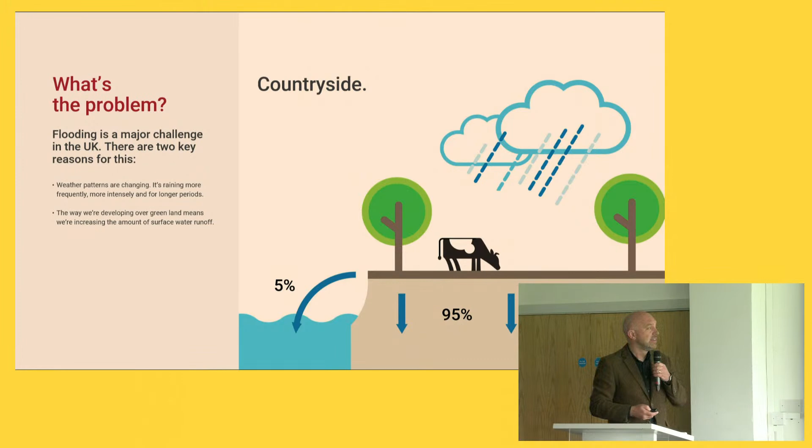Previously, when rain fell on open green land, most of it soaked down into the ground, and a little bit would flow away into waterways, channeled into the sea or a receiving watercourse, and that worked fine for years. But then companies like Marshall's came along and concreted over that beautiful green landscape, stopping the water soaking down into the ground. So the majority of water is now prevented from soaking down and instead flows at high speeds and in large volumes into the receiving watercourses, whether that's a sewer, river, stream or tributary.

So those 2 factors together mean that we've got a problem - that's why we're seeing more flooding going on. Sustainable drainage systems, or SuDS - the term was coined in the late 90s, ish - and it's cottoned on, and it's now become quite a radical movement.

It's not a new thing though, and this is the key thing we're keen to get across. Sustainable drainage systems aren't new, it's not 'there be dragons' - they've been around for about a quarter of a century.

What are they? Years ago, we managed water by channeling it away from infrastructure - that's basically what the Romans did. When water was coming down a hill towards them, they'd dig a channel, dig a route, and get rid of the volume of water, channeling it away somewhere else. That did its job - drainage was always about getting rid of a large volume of water.

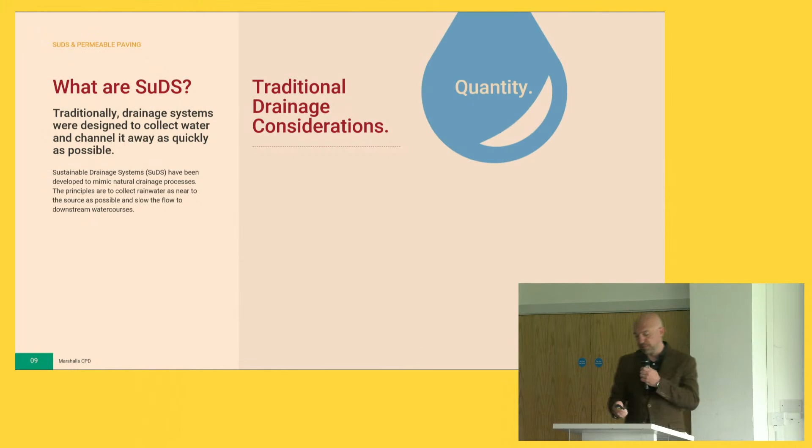They never really thought about the quality of the water they got rid of. They rarely thought about amenity or biodiversity - it wasn't part of the philosophy, it wasn't part of the principles of drainage. The whole idea was about getting rid of as much water as possible, as quickly as possible, to protect your infrastructure. A good sustainable drainage system, though, can do so much more than that.

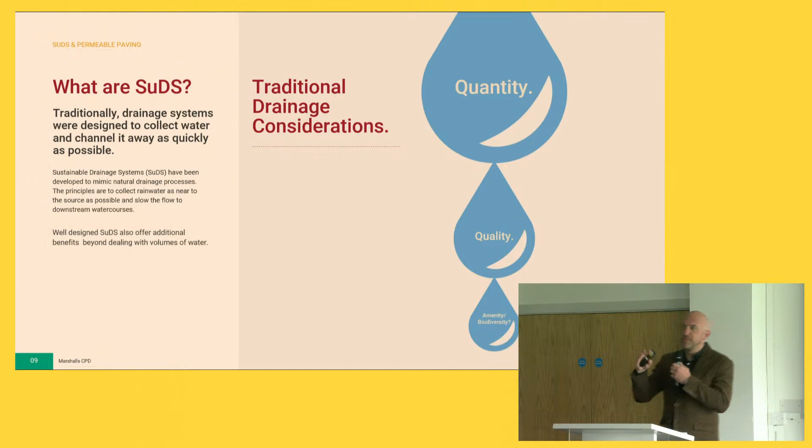So when it was launched, there was the SuDS triangle, wasn't there - the 3 elements you had to balance. That's become more complicated now - there's the 4 pillars of SuDS. People are trying to put new things in all the time. The key point is that you have to balance all 4 factors to make an effective sustainable drainage system. It's not just about the volume of water, it's not just about one thing - it's about balancing quantity, quality, and then adding in biodiversity and amenity.

We have to deal with the volume of water, dealing with the quantity is absolutely key, so we can't forget about that in all the stuff we're going to talk about now. If it doesn't manage the volume of water, if it doesn't get rid of the water, if it doesn't protect your infrastructure, then it's failed as a system.

But what a good sustainable system should also do is improve the quality of the water that flows off as well, because we've got a big issue with more cars on the road, so there's more pollutants. We've got a big issue with water quality as that goes thundering down into the sewers, carrying all the surface water runoff as well. So a good sustainable system will improve water quality too.

The two aspects at the bottom, though, are a fairly new concept. A good system can actually provide amenity benefits. It can provide a nice place for people to hang out in, a community space that kids can play in and people can sit and relax in. That's something a channel and a pipe can't do.

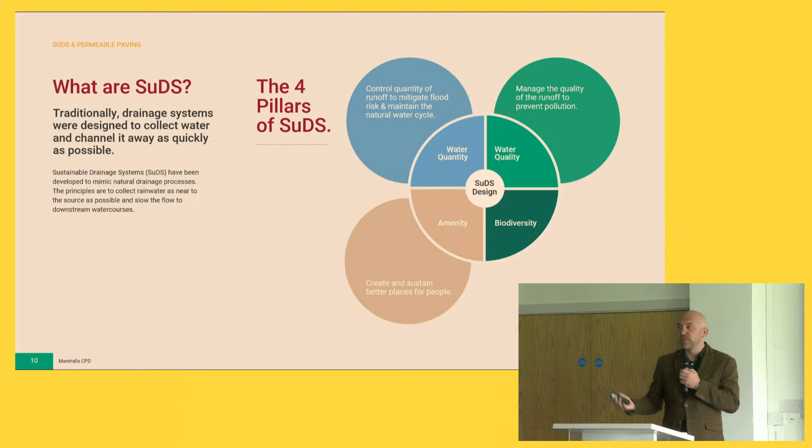And finally, as is getting more and more important with all building standards, it needs to provide biodiversity benefits. It needs to provide a space for flora and fauna to flourish in, for all the benefits it brings. I'm not going to talk about biodiversity net gain here, that's a separate topic in itself.

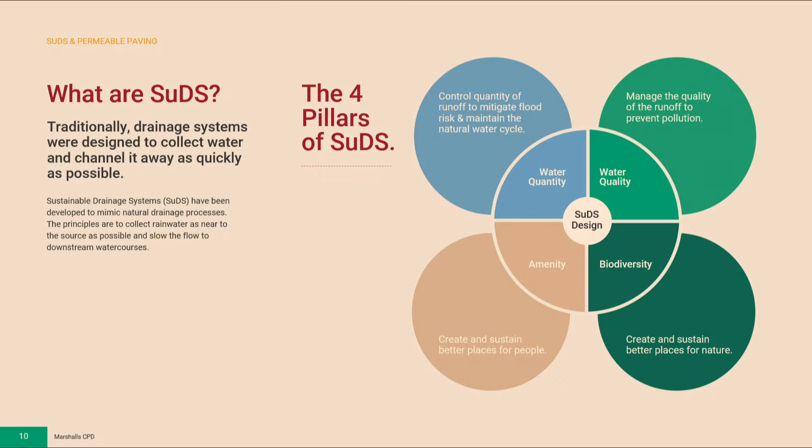But introducing more green infrastructure to spaces is going to improve things, as well as managing surface water. It provides air quality benefit, it improves air quality, it provides biodiversity habitats for animals and insects to live in, it improves mental health. There are so many multiple benefits from introducing green infrastructure. It's essential that we balance that while considering all the other things a drainage system should do as well.

While we're talking about that, something that came up through conversations over the past 10 or 15 years was that there are loads of different ways to manage water, loads of different tools, philosophies, products, and all of them have their place. So as a SuDS purist, and I'm sure Charlotte would say the same, you want to manage water on the surface, as near to the surface as you can, using soft landscaping, but that's not going to manage everything we need.

So what we came up with was the idea that you can use all the techniques, all the products, all the systems, as long as they're appropriate and as long as you've considered them in the right order.

So you start with natural flood management, which happens way before we get involved or you guys get involved. That's stuff like putting logs and trees and twigs across streams up on the side of valleys - something you do with your kids at the weekend - and it slows the flow of the water down the side of the valley, so by the time it gets to the urban catchment it's been slowed down and spread out.

So it allows water to infiltrate and it's not going at high speed. Then you want to consider soft SuDS, the features I talked about before, things like attenuation ponds - just big pools of water that store water, which soaks down over time. Rills, swales, just landscaped solutions that collect the water and allow it to slow its flow through your catchment, infiltrating all the time and picking up water quality benefits as well.

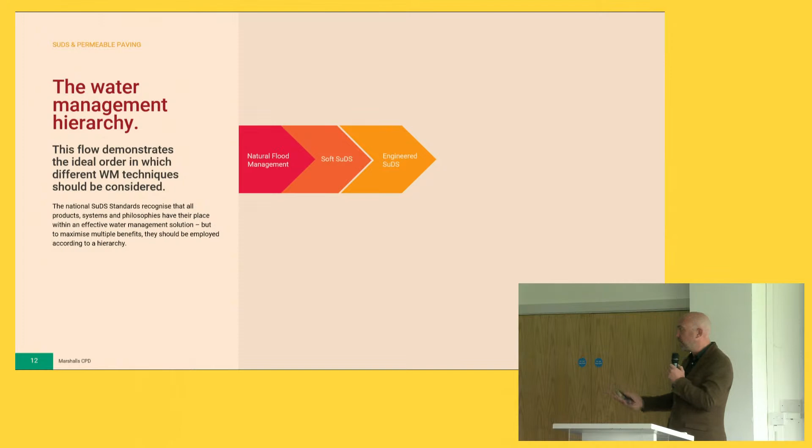When you've used up all those opportunities, look at engineered SuDS. This is where Charlotte and I, or Polypipe and Marshalls, come in - things like permeable paving, and the green infrastructure solutions that Charlotte will be talking about shortly.

And there's absolutely a place - we say positive drainage - for things like channels and gully pots. In an urban space, you need that kind of positive drainage to get water safely and quickly away from the space. Underground attenuation is absolutely necessary as well, we're talking about big underground tanks and pipes. Polypipe have, a big part of their offer is crates.

A big part of what we do as well is underground tanks and pipes. The point is, you don't go for that option first. Start at the left-hand side of that graph, move your way down, and before long you're probably going to end up at the point where you need underground, big sort of heavy-duty storage, certainly with the deluges that we're going to see coming.

And there's even a place for flood protection, just building a big wall to stop the flood water coming. All of those are legitimate, sensible approaches to water management. Just think about them in the right order and use them in the right way.

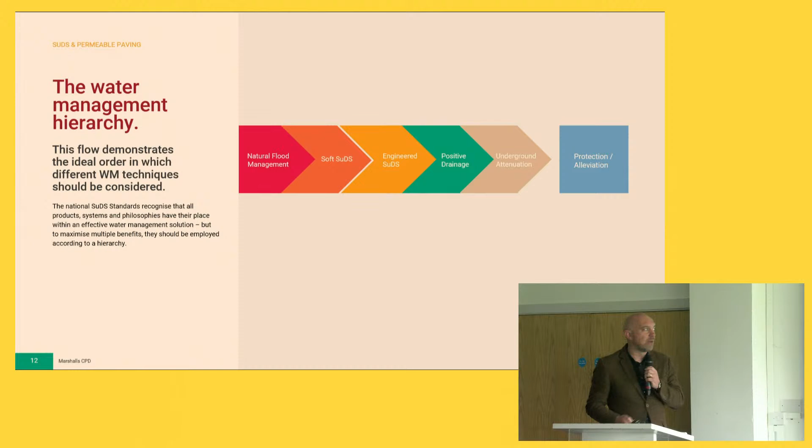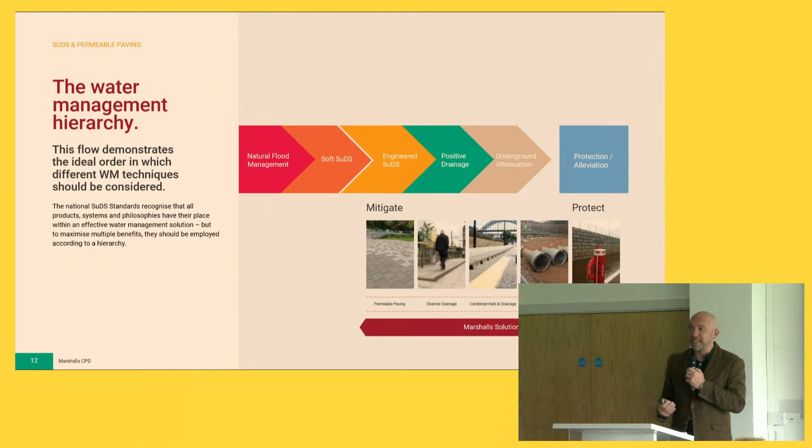What's interesting for us is that's the area that we operate in. We don't sell grass and we don't sell trees, but what we're finding is that legislation and more awareness is driving people back up that hierarchy, driving people to consider soft SuDS first. So the challenge for us as manufacturers is to come up with products and systems that make it easy for people to install those features.

And the challenge for designers and installers is to think straight away about how they can cram as much green space into their developments as they can. And that's not just for drainage purposes - that's for all the other legislation, the biodiversity net gain, the nutrient neutrality legislation that's in place in some areas as well. So that's as much as I wanted to talk about to start off.

So hi guys, I think what Chris said was absolutely right in that we have to think about the way that source control SuDS and shallow systems work with deep systems and how that green infrastructure as well as engineering works together. And I was working with a colleague of mine at Polypipe when the new sewer sector guidance came out.

Chris and I were talking about this because one of the things that you guys will see as a merchant is that the legislative changes that take place really do, as Chris said, drive people back up that graph towards the left, towards the more soft systems.

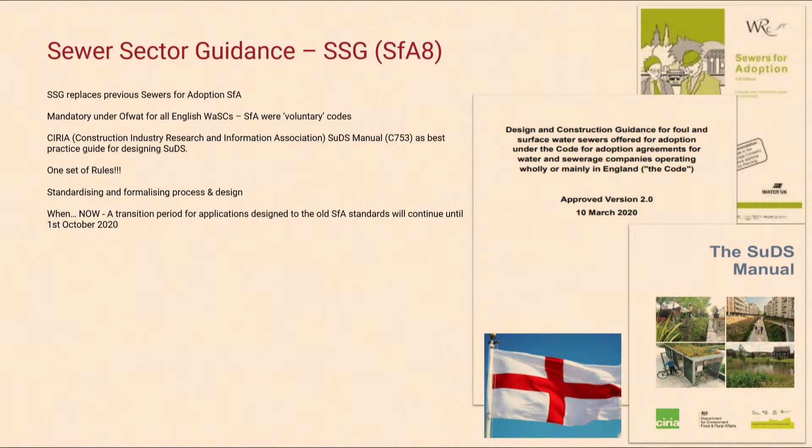And what we're finding now is that water companies and planning authorities are actually telling developers, we don't just want deep crates and pipes as a first point of departure. We want you to consider how you could think about tree pits, how you could think about swales and other green infrastructure assets as adoptable forms of a sewer.

So actually the definition of a sewer itself has now changed to incorporate green infrastructure, which has caused a heck of a lot of confusion with the water companies because they're coming to us and saying, well, what does that mean in terms of how can a tree pit convey water? How can a tree pit manage water? This is all weird and wonderful to us.

And as a merchant, if you've got this knowledge and you've got the product ranges from Marshalls and Polypipe to be able to facilitate that, you've really got a USP because they're going to be coming to you to ask you how this all works.

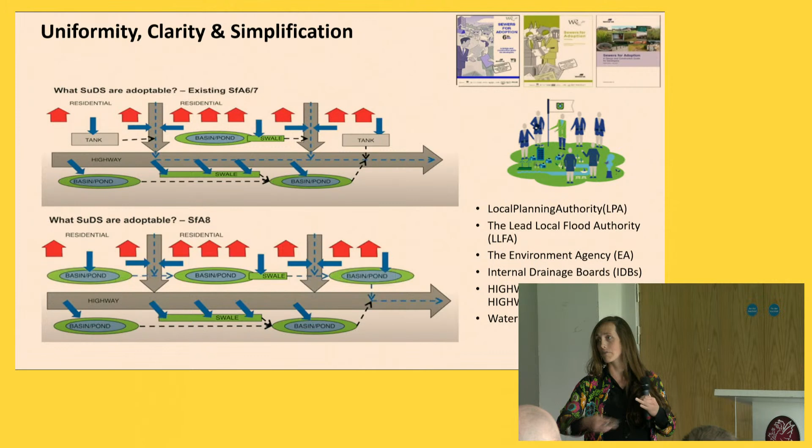And what you might see on a development, which is a really good change and not necessarily a problem, is that you'll have a mix of what we call adoptable and non-adoptable features. So adoptable meaning that the water company will happily take on the maintenance and the management of that asset post the sale of that plot and everything going through. So tree pits, swales, basins and ponds, soakaways, what Chris and I were talking about with crates and pipes - they're all perfectly adoptable.

But you might find in the near future that lower cost systems, for example putting vegetated roofs on top of a garage or indeed green and blue roofs, will actually be something that a lot more developers are exploring. I've had a lot of developer clients coming to us talking about new builds that will automatically have green and blue roofs on to store water or for added, as Chris was talking about, biodiversity net gain.

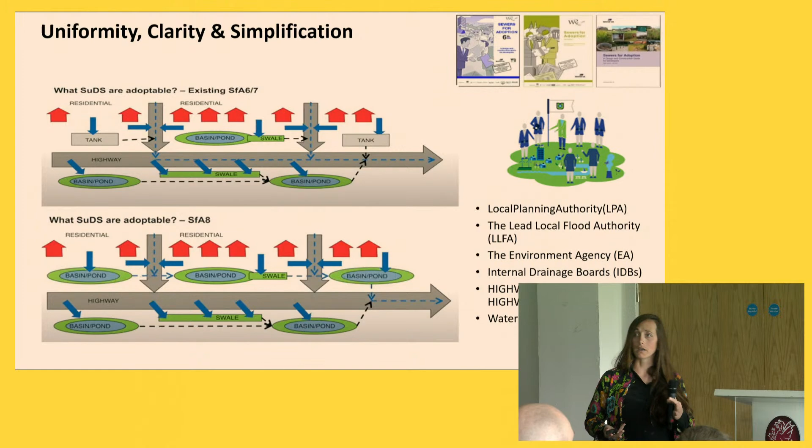So there's going to be a range of green infrastructure assets on new developments with a range of requirements in terms of products, solutions, services, all of which can and should manage water. So these are just a few things that guidance change has actually precipitated - this more creative response to managing water. And we're seeing this in the designs that are coming forward from engineers.

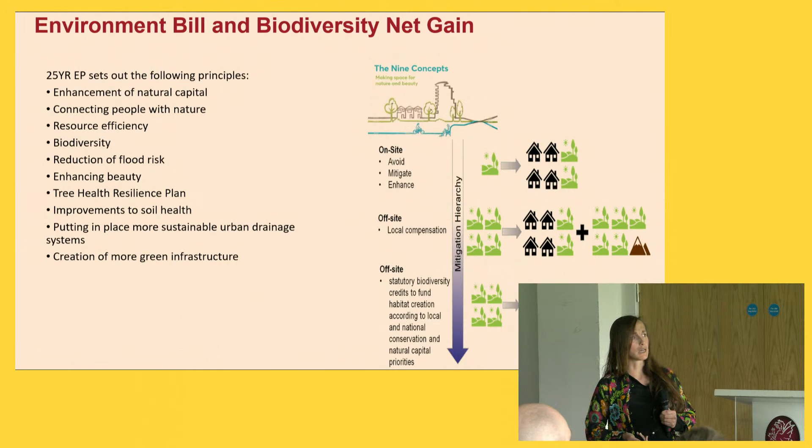And again, the Environment Bill, the move towards net zero, and there's even new talk particularly in central government around what they're calling water neutrality now. The idea that every development should be water neutral, it shouldn't be adding any more water to the combined sewer network than when it began.

This is all a huge pressure for viability, because if you're a developer, you've only got a finite amount of space to pull all this off. And this is where you guys come in, because if you can optimize those green assets through engineered solutions beneath them, to support those green assets and also manage water, if you've got multifunctional ways to do this, you're really cooking with gas, because you can offer that full range of solutions that will save space, time and money. This is a really good area of the market to exploit if you get it right.

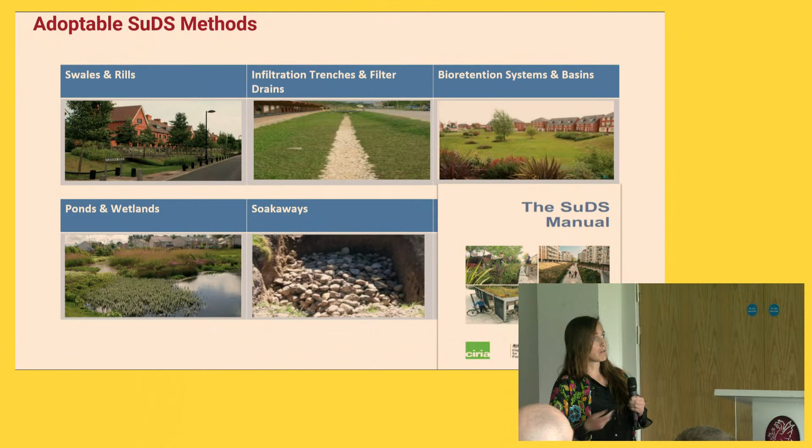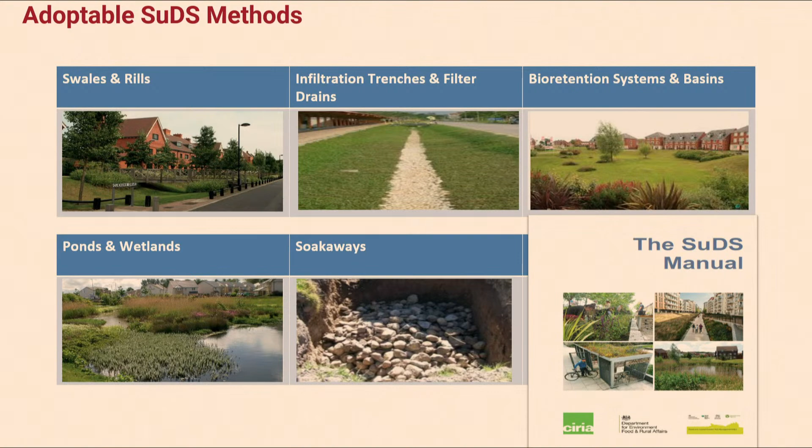So what's adoptable? Swales and rills, we'll go through that in a minute, bioretention systems and trees, and as Chris was saying, soakaways and ponds and wetlands. So we do a lot of work on this, and Marshalls as well do a lot of work on these kind of approaches, where we're not just doing the soft SuDS as we described at the very left of the spectrum, because we can't always do that.

There might be a reason why we need to put more water storage under a green space. For example, if you've got a small compact development, if you've got an urban site, we often find that actually to manage the volume of water we need to on a particular plot of land, we need to be giving you more water storage. So this is where we bring in the green and the blue together.

This is where you as a merchant can talk to the developer about the kind of systems that could be used to make this happen. And we're not there yet, I'm not going to lie. We don't see this collaboration all the time because it's quite a technical sell. As you can see, there's a lot of design work involved, ordinarily a lot of technical expertise required. But there's no reason, when Chris and I were talking, that this couldn't become more off the shelf.

Especially on residential developments, there's no reason why these can't be packaged up and made more accessible for developers. There's a lot of time and money and a bit of wasted energy, actually, where people go around the houses trying to integrate trees and SuDS on a site, where really if they just had a simple, accessible package solution, some of the things I'm showing you here, with just a few product ranges that you guys could offer, Marshalls and Polypipe are well able to facilitate these kind of things.

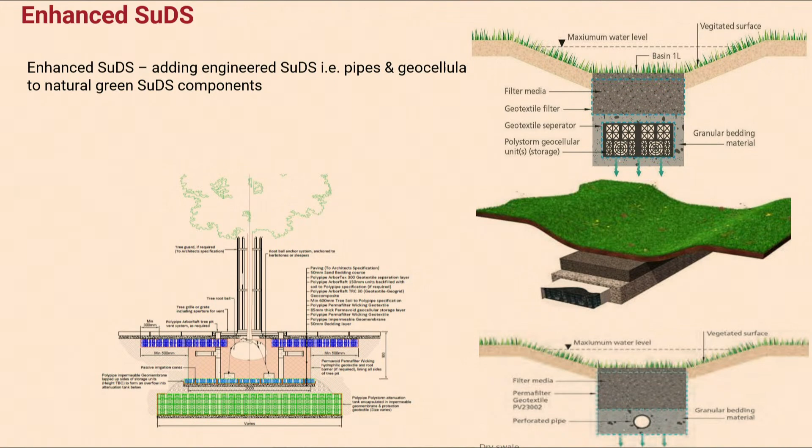It's very simple to enhance and optimize green assets on a development. So by using something like our Permavoid or our Polystorm crates, we've acquired other businesses within the Polypipe family for more of an extended product and suite of solutions. You can actually cater to developers with a variety of budgets as well, because what we don't want to do is price people out of greening their developments. And I think that's a real barrier sometimes, particularly in things like Tree Pit World.

Chris has probably experienced this as well. You know, developers, they're not anti-greening, but they're just anti the headache, the time, the money that they perceive these things to take. So we've got to make it easier, simpler, and pain-free.

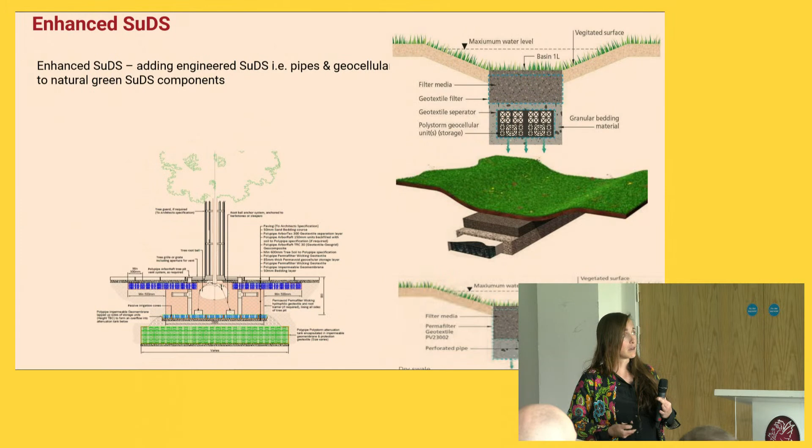And indeed, treatment and removal of pollutants is becoming a huge issue, and it's really expensive. So we've got to look for cheaper ways to create green assets that can also manage things like phosphorus. That's a huge issue that you guys are going to come across even more now. And I think Marshalls and Polypipe working together for how we can create kind of integrated approaches to getting phosphorus off a site and making that cheaper is going to be a really good way forward.

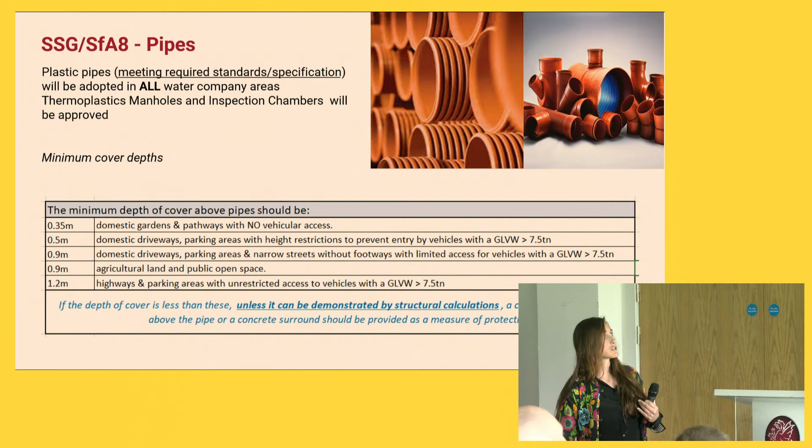I don't really want to talk about pipes today. It's in there, but please forgive me. My colleague Sue Illman and I were looking at the Polypipe website yesterday, and she was like, it's all about the pipes, come on. And I said, we are under construction on the website, but we do more than pipes. But they are necessary. So despite my personal aversion to talking about pipes today, we do have to get water from A to B, and there are times where between green assets and between SuDS features, we're going to need some pipe, whether it's Marshalls or Polypipe, we're going to need it.

On any development, you'll be able to package this up so that you've got your conventional suite of solutions and your more creative green infrastructure assets. So the developer has got you as a one-stop shop to go green and also use conventional methods. As Chris said, the reality is you might have some tree pits, some SuDS, then you'll have to convey through pipes, have a soakaway, some deep attenuation tanks and some treatment. So you're selling that holistic approach as well as slowing the flow.

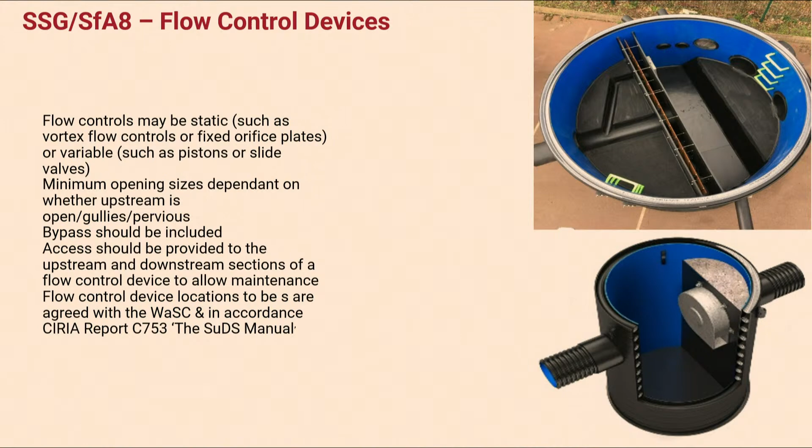We're not beavers. We're not going to be able to just put a load of twigs somewhere and slow the flow on a development site. We're going to have to slow it through some other means. We can do some natural flood management upstream, but in reality, there's going to be times where flow control and those kind of interventions are necessary.

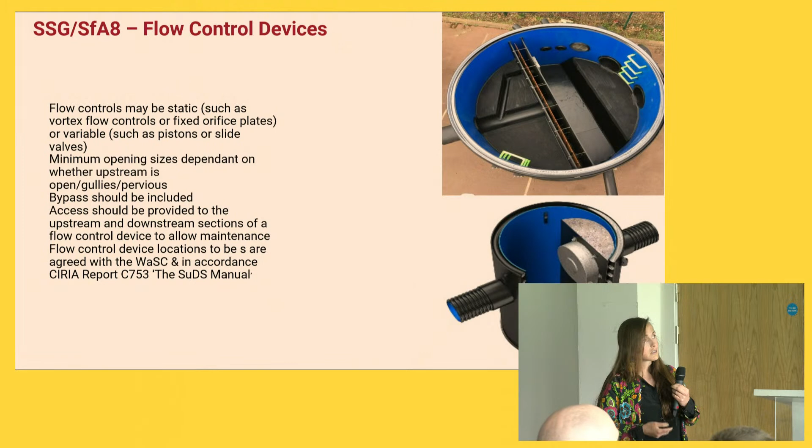So again, it's about understanding that range of solutions. I definitely recommend, if you haven't, have a look at the CIRIA guide for the construction of SuDS. It's not bedtime reading, but it's a really good point of departure to understand where developers and designers are coming from, and all the SuDS features are covered, from tree pits to swales to bioretention to basin tanks. I wanted to show this because Part C of the new sewer sector guidance talks about how these adoptable, non-adoptable green features come together.

As Chris was saying, there's a time and a place for everything, and permeable paving is in there, swales are in there, storage tanks. What we discovered from chatting together is that there are lots of ways Marshall's products and Polypipe Permavoid systems can create the ultimate storage beneath Marshall's permeable paving. There's no reason why you can't optimise that permeable paving offer, and no reason why you can't mash up the two product families.

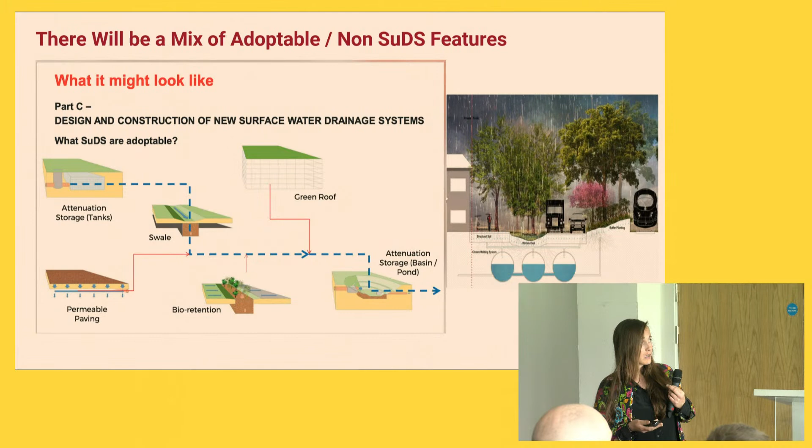These things are compatible, and you should exploit the people supplying you to make the best of what you can offer. This goes for how you mix up all these features. You might well be able to sell some attenuation crates. You could use other geocellular to create an enhanced swale feature, and you can also use geocellular for things like permeable paving and tree pits. At Polypipe, we use a number of these geocellular options to do all this.

That's not to mention also the importance of rainwater harvesting, which actually we didn't talk that much about. But it's not because we don't know a lot about it. Rainwater harvesting is something we're getting asked increasingly a lot about, and also the evolution of smart as well.

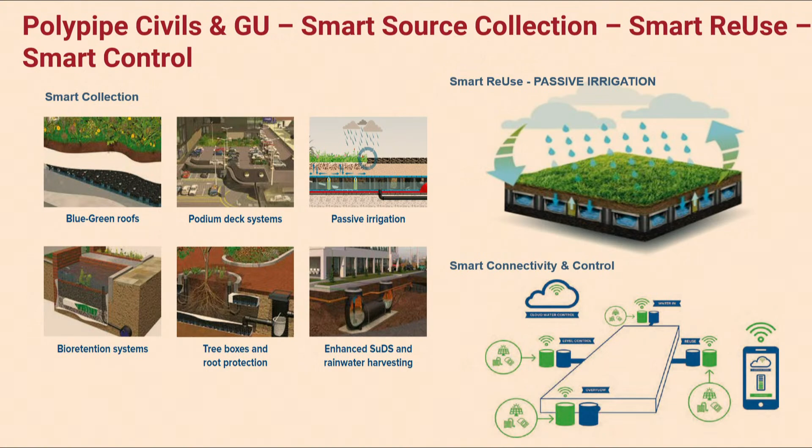That's another thing I wanted to signpost, because we're moving towards a world now where IoT and tech solutions—in the Netherlands, for example, even basic domestic garden centres and companies sell smart systems for people to manage water in their greenhouses and automate a lot of services, making them lower maintenance.

I think there will be a time in the future—and Chris is talking about how we mess around with things like the triangle of SuDS, the 4 pillars of SuDS—I think added on to this idea of quantity, quality, amenity and biodiversity, the 5th pillar will definitely be smart in the future.

Just like you can turn on your heating when you're away from home, you might even be able to manage your water and your irrigation and your SuDS features remotely in the future, which we're doing on green and blue roofs, and which we're doing at a local authority level through tree pit systems, alerting local authorities when their tree pits are dry or when their green assets are failing.

This is something developers and management companies will really exploit, especially if they've got 2 or 3 years worth of obligation to keep them looking good after they've handed them over. So in terms of long-term management, there's a lot of things really happening.

Not to mention the importance of passive irrigation, which is something you could easily also sell as a merchant—the use of capillary cones within geocellular systems to enable us to wick the water back up towards the green asset and store it, so that we even out those periods where we've got too much water and not enough, so we're not just constantly using mains water to keep things looking good.

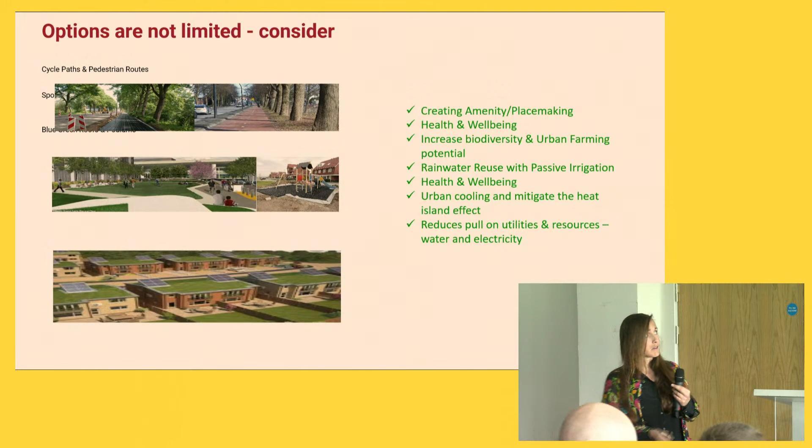So it's much more sustainable than business as usual, but it's not limited to those kinds of approaches. Consider all those enhanced added benefits - think about the amenity, the placemaking, reducing the pull on utilities and resources, rainwater reuse and passive irrigation. I don't really want to go through the whole plethora of the product range, but these things all work together.

And do ask us about it, and we will do training. Marshall's probably the same - our door is always open to add on to what you're hearing today. And they're simple, modular solutions.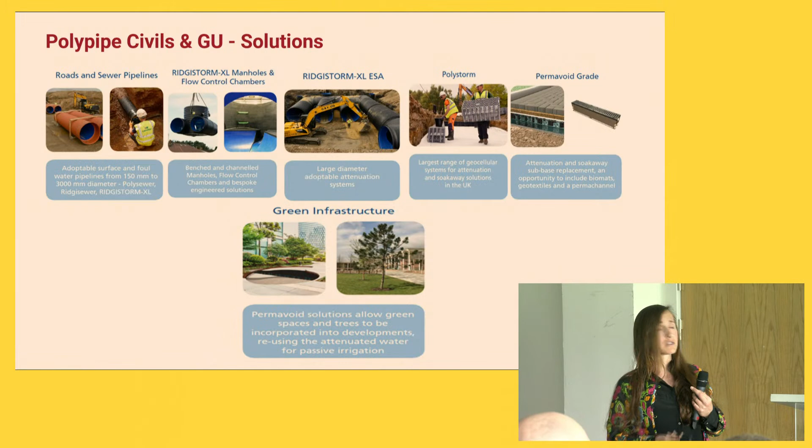This is just an example of our permavoid system with passive irrigation, and this does so much for a developer if they know how to use it. If you guys are enabled to explain to them how it could be used under a green asset, for example a tree pit or in a rain garden, then the possibilities for them really open up.

As well as working on a scheme, even with permeable paving as an example - often you might use an aggregate underneath permeable paving. Let's be more sustainable, let's consider using something like a permavoid unit. Let's make it cheaper and easier for the developer to bring product to site, reduce labour costs, and think about all those added benefits of how we mix and match products. Not to mention we can reduce loading when we use more structural, modular, enhanced solutions.

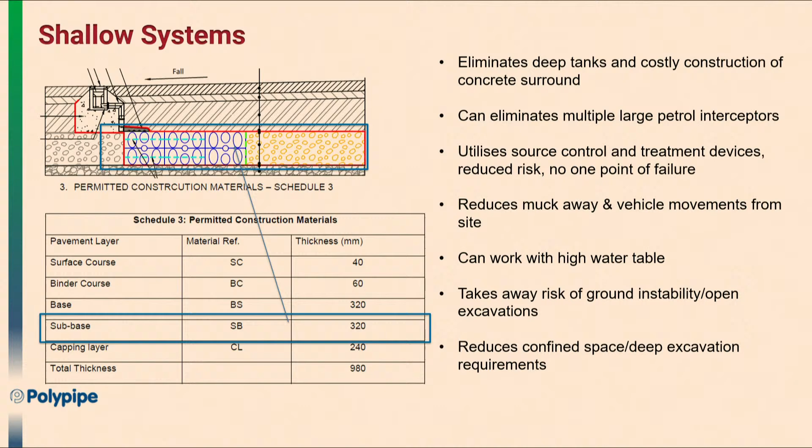And make use of our design guide. We've got a really good design guide that's downloadable, and it'll show you how to design with all these SuDS features. I'll send Giles a link to that design guide so you can all make use of it and ask us any questions. It just shows how these products can be packaged to create these off-the-shelf solutions to give people what they need, and with technical details we can help you guys detail up these kinds of packages.

This does look a little bit scary when you first look at it - it did me when I first joined Polypipe. But actually, they're really simple ways to integrate geocellular with Marshall's permeable paving, for example, or some channel drainage. As Chris was saying, in reality we'll be using 3 or 4 different products or techniques in one package solution when we're doing SuDS.

And it's really simple - just pick up the phone to us, and we can guide you through it and tell you how to package all that up together.

The big one for me, being the green urbanisation person, always being called the tree lady in the office - if you're going to go green, developers always name their roads on a new development like Sycamore Drive or Maple Avenue, but in reality the trees just look dreadful. Why is that? It's because they don't do it properly, and they try and get away with as little as possible - it's not their fault, they're just being priced out of it. So my mission is to get tree pit packages into you guys that will be off the shelf, much cheaper, much easier for developers to get volume trees onto a site that can also manage some stormwater and surface runoff. Importantly, they need to be structurally sound enough not to buckle under a highway and to annoy the highways engineers so they won't adopt them. These are the challenges of doing proper green engineered SuDS solutions.

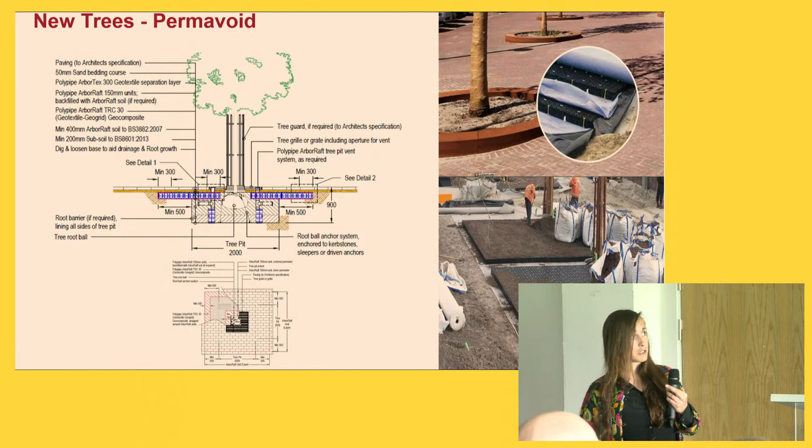So this is what we're here for - this is what Marshalls are here for, to make this easier. And we could also get to a point where we start getting you guys to give good advice on the soil as well. Soil's a big part of this - SuDS without soil is a bit of a dud. The soil is a huge part of it. The specification, the porosity, how water moves through the ground from start to finish is critical, and we need soil volume if we're going to create these decent green assets for the future.

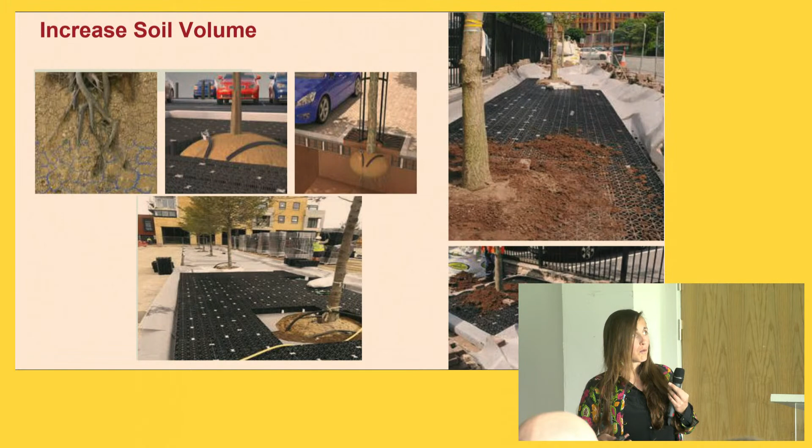Again, you can design 2 SuDS features at once - you don't just have a rain garden, for example, you can put some trees in your rain garden if you've got the right products. You can mix up all these features, and it's really modular and really simple.

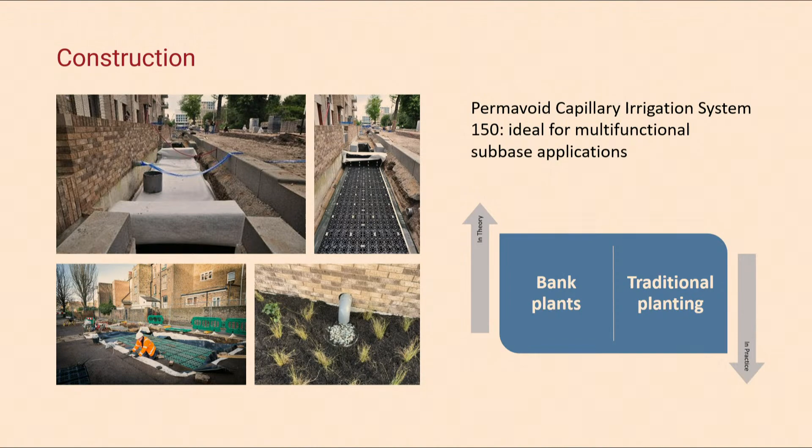And I'm going to hand back to Chris to talk more about permeable paving as well.

Well, that's bang on time as well. It's almost like we rehearsed it.

Just to pick up a point about smart water systems, one of the things we're preoccupied with at the moment is that another consequence of climate change is the urban heat island effect. We're going to get really hot, really uncomfortable urban spaces in 10, 15, 20 years' time. One of the solutions is green infrastructure, so that's another reason for putting more trees and more green infrastructure in. But another one is open water. If you've got a large expanse of open water, it instantly makes people feel a psychological effect - you instantly feel 1.5 degrees cooler when you see open water. But it also actually, the evapotranspiration effect cools the area down as well.

If you ever want to go to Bradford, which is just down the road from us, the Centenary Square in the middle of the city is just like a slightly contoured paved area. But when it's hot, they pump water into it, and it's amazing. From a place-making point of view, kids come out and play in it, families come out and mess around in it, and it feels cool. It's a really practical system.

So the idea of having a smart water system that holds onto rainwater when it can provide an asset, but releases it when we know there's a storm coming and we need the storage - that kind of smart water system is something I think we need to look into a little more. Another point I picked up on is that a lot of the details and concepts we've been looking at might look really complicated because there are loads of different circumstances and applications, but ultimately it's only about 6 different components. So in terms of stock holding, there's only 6 parts to that Lego kit, but you can make so much with it.

And it's the same with permeable paving, and that's what I'm going to bore you to death about. This is what I've been clattering on about for the past 10 years. So if you have got any questions later, I'd be more than happy to talk to you about it, but I can't say I'd recommend it.

Let's see if this works. It might.

Yes, this is our sort of Marks and Spencer's advert, slow motion, high definition, super sensuous.

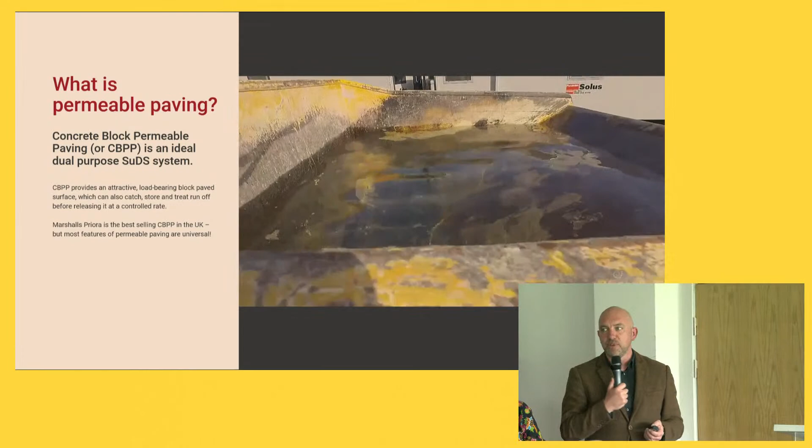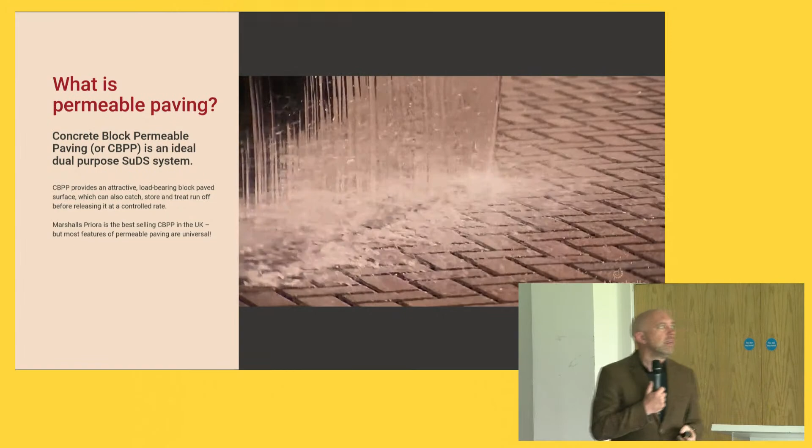Data from here, for 4 years. They'd not really done any maintenance on it. And it disappears - so it's a brilliant source control method.

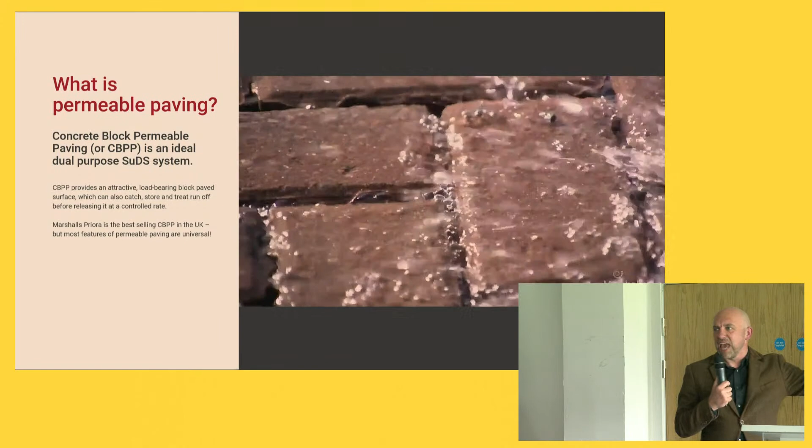Basically, you're not going to get a rainfall event like that, even in this country. But basically, when you get a heavy rainfall event, what happens is the rainwater soaks down the gaps between the blocks, and that's the crucial thing to get across.

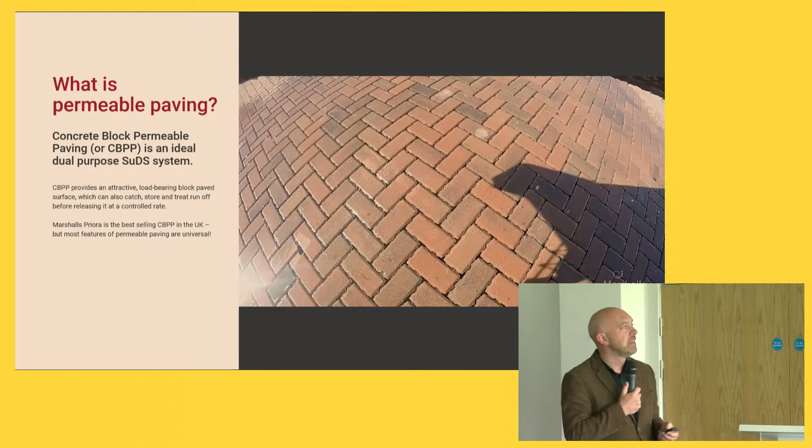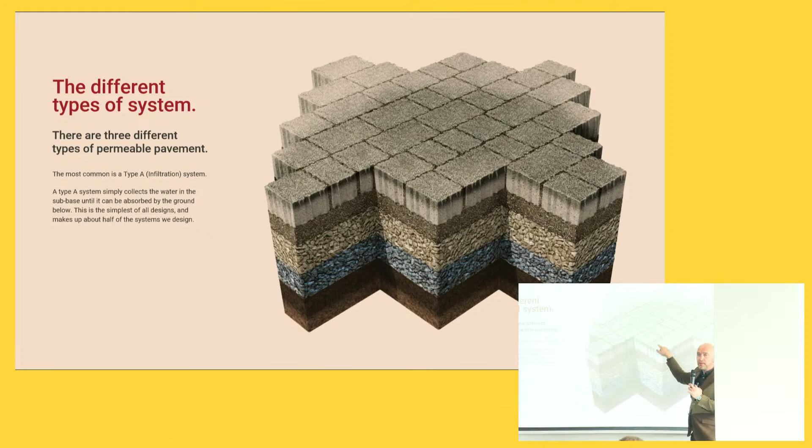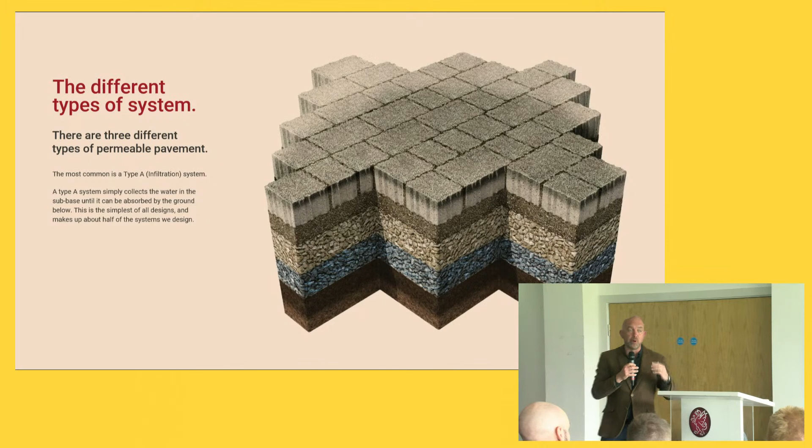If you're not aware of it, we've got some animations now - I think it's starting automatically. The crucial thing to get across is that it's just the same as a normal pavement. As far as an engineer or an installer is concerned, the blocks are made out of concrete, just the same concrete as all our other standard block paving. The difference is they've got special nibs on the edge, and the nibs keep the blocks away from each other, so you get wider joints between them, and then you lay the blocks on a different subbase than you would a normal pavement. But the principles are exactly the same.

Normally, you'd put MOT type 1, put sand, and then put concrete blocks on top. With this, you put in large open-graded crushed rocks, then smaller open-graded crushed rocks, and then blocks on top. So what happens effectively is the water soaks down between the gaps, it sits in the subbase, where it can do one or two things.

In this example, a type A system, it'll soak down into the ground at source. And that's the ideal, because it's dead straightforward. Then it's source control, you've not got any ponding, you don't have to worry about channels or drains. Basically, wherever the rain falls, it's just going to soak down into the ground, and you've got a zero discharge part of that development. About 50% of our designs are type A systems, where the water soaks into the ground.

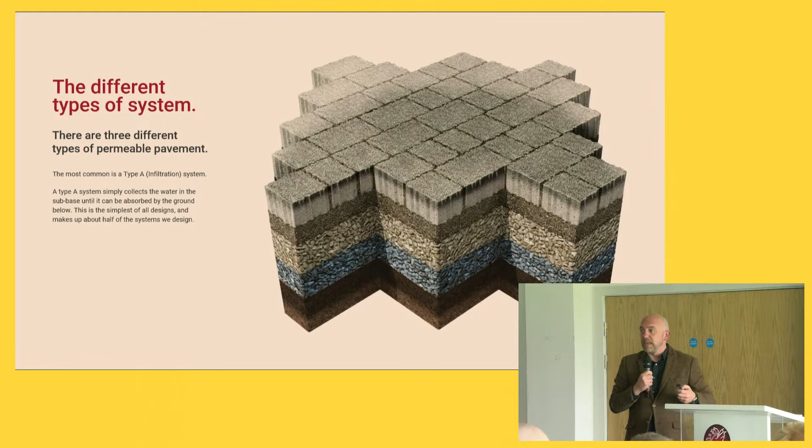Alternatively, you've got a type C system, because you might have contaminated ground, or a lot of contaminants potentially on the surface that they don't want leaching into the ground below. So what you do is put this membrane, an impermeable membrane, around the bottom of the tank. You're effectively creating a basin, so the water sits in that, and then it's channeled away at a controlled rate. So it's not soaking down, so we're using the pipes again - we're not dead excited about pipes, but they're a useful tool to have in your armoury. So you'd have a perforated pipe at the bottom of that system, and that means you can direct the water where you want it to go, at a rate you need it to go at.

And the other point is that we know through some work we did with Coventry University about 6 years ago, that the water that comes through the system is already being cleansed, because there's a mechanical and biological filtration process that goes on throughout that system, because there's a lot of microbes living in the subbase. So that's why good SuDS designers like these systems.

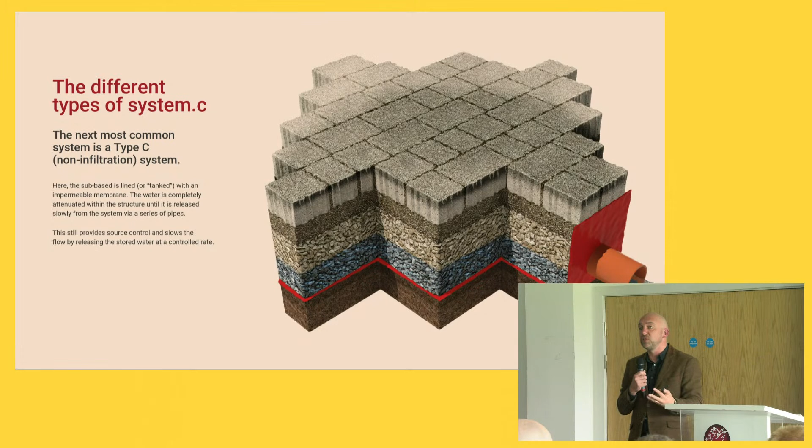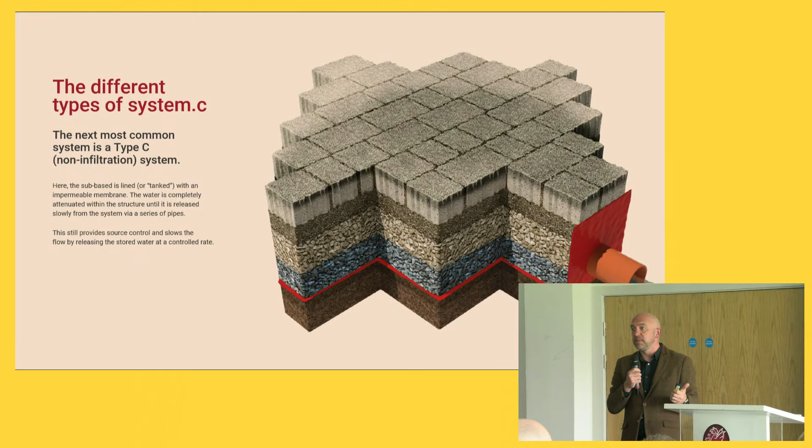They don't provide biodiversity benefits, so let's face that one off, and they don't really provide amenity benefits unless you like hanging around in car parks. And if you do, that's your business. But they do provide brilliant source control - they get rid of volumes of water, and they improve water quality. So that's why they're a useful tool to have in your belt.

We always talk about putting permeable pavements on top of aggregate, because we know how that works. But we've come across more and more jobs lately where putting them on top of crates or tanks, putting them on top of permavoid, allows you to get much shallower systems.

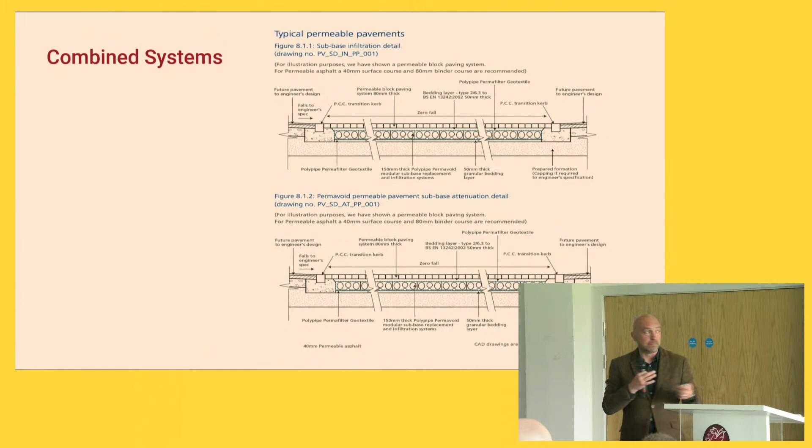The void ratio in the aggregate that we specify is 33%. So for every 3 cubic meters of subbase, you've got 1 cubic meter of water. The void ratio in a permavoid tank is 97, 98%. So basically for every 3 cubic meters of crate, you've got very nearly 3 cubic meters of water storage. So that means you can get away with shallower systems - you don't necessarily have to go as deep.

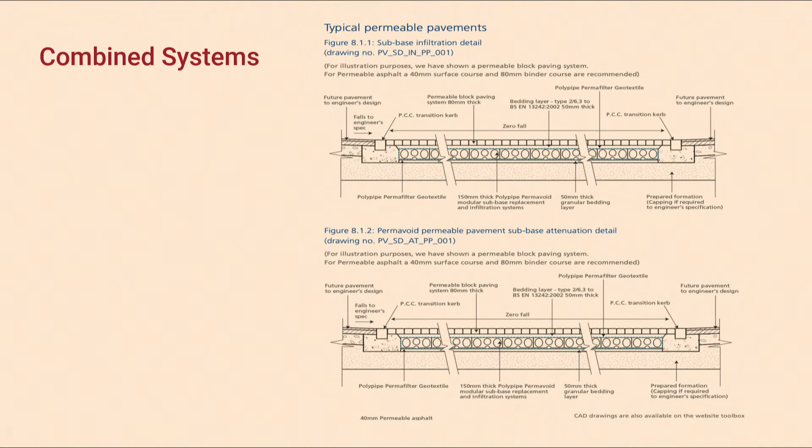Again, it's about understanding what conditions you're up against. In city centres, for example, people don't want to dig down because there's services, there's basements, there's all sorts of reasons why you want to keep shallow systems. That's where using these sort of hybrid systems works really well.

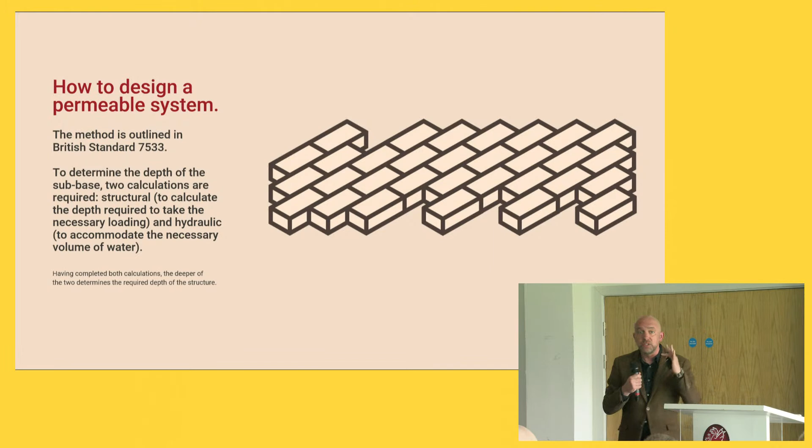It's really simple to design a permeable pavement. I can make it sound really complicated, but I'll try not to. The key thing, and it's the point we always make as suppliers and manufacturers - we love talking about it because we've got very little else to do with our time - so do phone us up, talk to us about it, ask us questions, direct your customers to come and talk to us, and we can help you through.

We can give you some off-the-shelf designs, or we can do bespoke ones. But ultimately, just so you know how easy it is, you've got to do 2 different designs, 2 different calculations when designing a permeable pavement. First, you do a structural design to decide how deep it needs to be to cope with the load you think it's going to take. So if you're doing a driveway, you're going to get a car on it, maybe 2 cars most days. If you're doing an access road, you're probably going to get at least 2 HGVs a week. So the deeper the subbase, the heavier the trafficking it'll take.

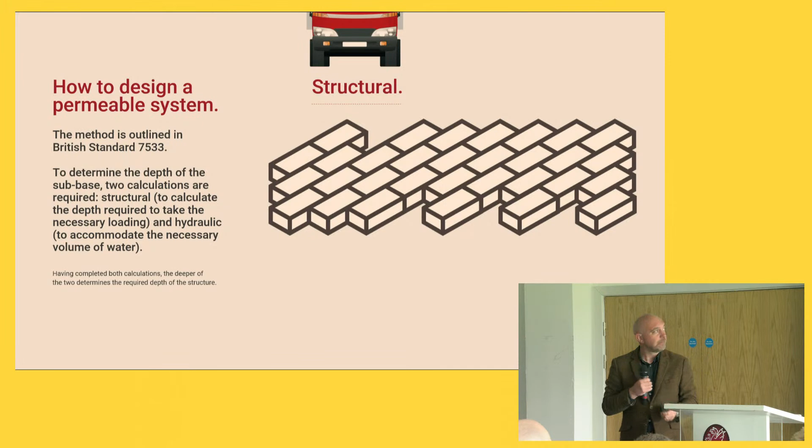Once you've done that calculation, and come up with how deep it needs to be, you then do a separate hydraulic calculation - that's how much water you need to store. So you need to think about what are the rainfall events, how much rainfall is it likely to take, given the rainfall patterns of that area. You can get that from the Met Office.

You also need to think, is it collecting water from anywhere else? Has it got any roof water going into that system? A lot of housing developers are taking their roof water, putting it straight into the subbase, into a tank, or into the subbase of a permeable pavement.

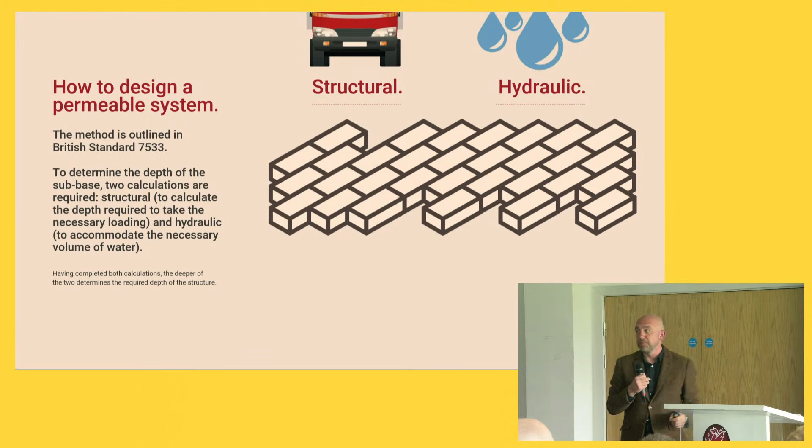So then they're not discharging that into a combined sewer. When you've done your calculation for how much water you need to store, you'll know how deep you need to go to store the volume of water. So you're going to have 2 depths, you go with the deepest. It's that straightforward. 2 calculations, structural and hydraulic, and then go with the deepest one.

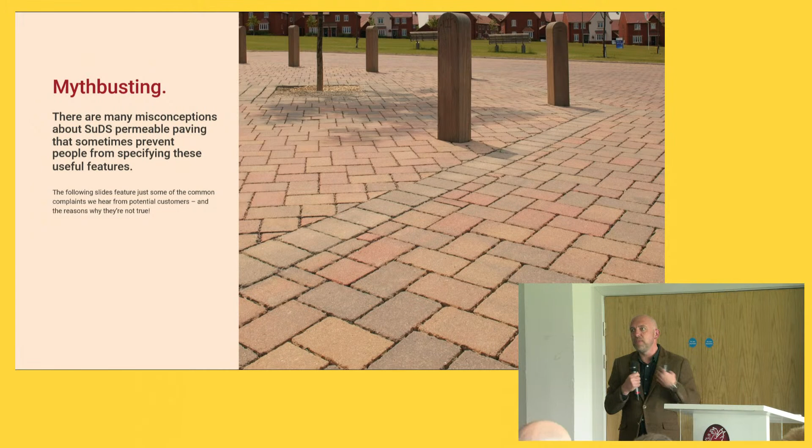One of the things I've probably spent more of my time talking about than anything else over the past decade is myth busting about SuDS and permeable paving in particular, because we've got a lot of experience about that element. We've been selling it as a business for more than 20 years, and permeable pavements first started about a quarter of a century ago. But if you talk to local authorities or your customers, a lot of them are terrified of it because they think it's new technology, they don't want to be the first, and there be dragons. So first of all, hold the hand, look them in the eye and tell them they're safe, it's been done before, it's not going to be a problem.

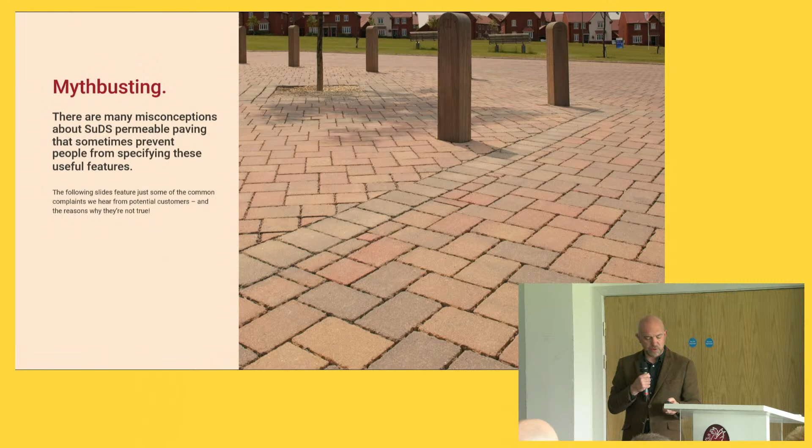We've got loads of these myths. There's about a dozen different myths about permeable paving and SuDS. I'm not going to go through all of them, but I'll just go through a couple just to put your minds at rest, because these are the 2 that you're going to hear more of than anything else.

More than anything else, people always say, well, I'm not going to put that down because it'll get blocked up. Because people look down at the joints and they see dirt and debris in the joints and they say, well, it's going to stop the water going down, isn't it? So I'm not going to put that down, I'll just put a channel or a gully in instead.

I hear that off my neighbours because it won't surprise you to know that I've got permeable paving on my driveway, and all my neighbours look at me like I'm a lunatic because they go, oh, it'll just get blocked up. Look, you can see it's blocked. It's not going to work.

First of all, a lot of research has been done into this. There was a study in 2006 by a guy called Sönke Borgwardt, and what he came up with was this idea that over the course of 10 years, it's going to get less and less permeable on the surface, because it does slow the rate at which water goes down. So if it starts when it's installed, it's got an infiltration rate of 100%. After 10 years, it hits just 10% of its initial infiltration rate. So what that means is the water's getting into the subbase slower. The good news, though, is that 10% is still more than permeable enough to cope with any rainfall event you'll ever see in the UK.

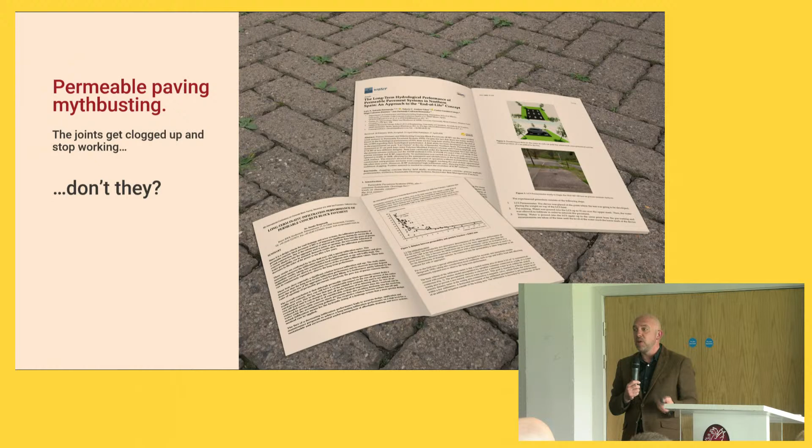So the reality is that when you look down, you'll see this sort of dirt and debris in the joints. But all that is a tiny little crust about 5 mil thick that just protects the rest of the system. So it does slow the rate at which the water makes it into the subbase, but it certainly doesn't stop it, and it doesn't cause any problems. The reality is that we know most of our systems get installed and never get maintained, and they're still working perfectly well.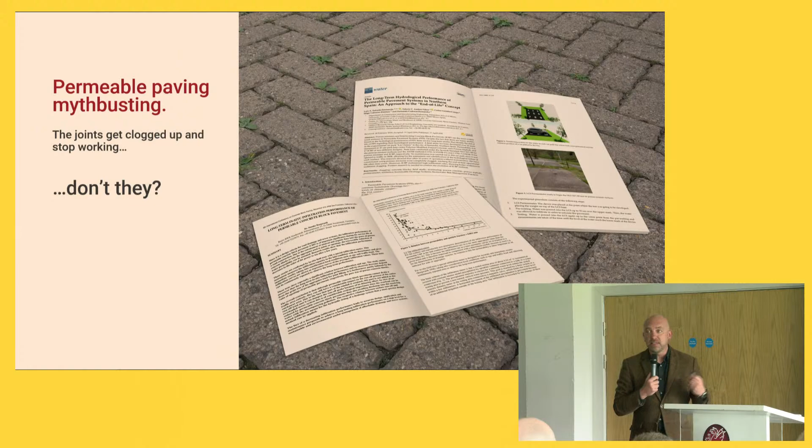There's another study in Santander in northern Spain, where they're comparing different kinds of permeable surfaces: permeable resin, permeable tarmac, permeable concrete. I'm sure you can guess which one's performing the best, otherwise I wouldn't have brought it up. But ours is still working. Even in a sandy environment, ours is working really well.

But still, people didn't believe us, so our paving engineer and I went out just between lockdowns in 2020, and we hung around 3 different car parks, and we performed American standard infiltration tests. You can find that on the internet if you've got nothing else to do this evening.

Basically, you put a tube with a known volume of water in, pour it in, and time how long it takes to soak into the ground. We performed that test at three of our longest-installed car parks, and even the worst one—this is the crucial bit to bear in mind.

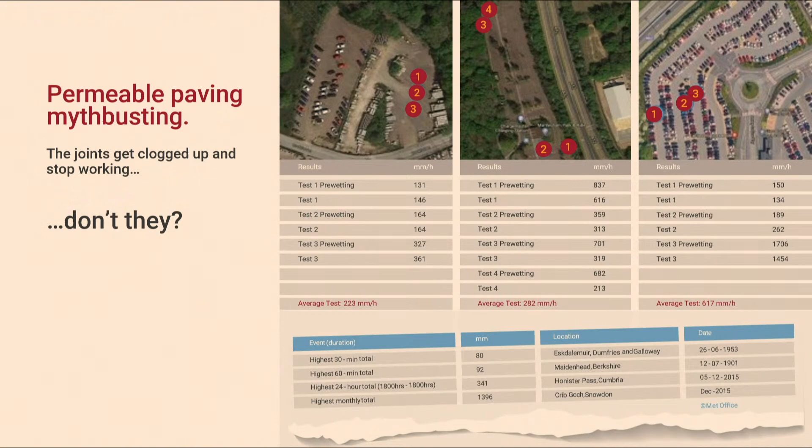We got this data from the Met Office. You can see there the infiltration rates of our oldest, most knackered, most unmaintained permeable pavements are still twice as permeable enough to cope with any rainfall event you'll ever find in the UK. So please, if anybody tells you that permeable paving gets blocked up, direct them to the research.

You can find that on our website if you Google Marshalls SuDS and permeable paving. We've got a whole page full of external research and external guidance, but it's also got the research that we've done ourselves, which demonstrates that that's not the case.

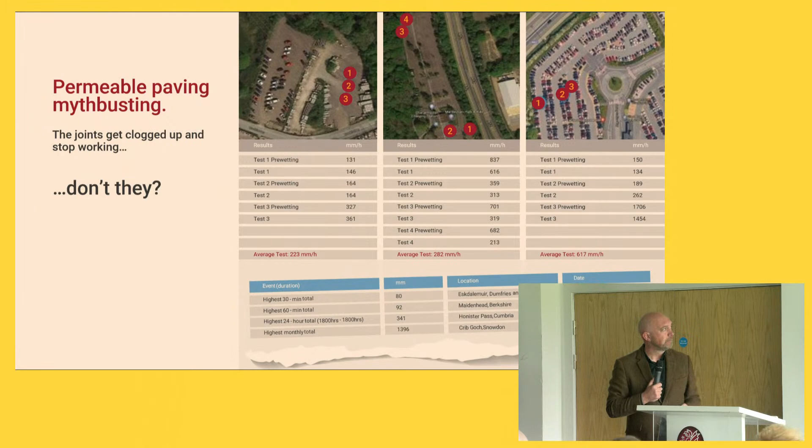The other myth I hear almost as frequently is that people are terrified permeable paving won't take heavy loads. And it will. You've got to design it properly, you've got to install it properly, you've got to know what you're doing, but as long as you do that—do you remember the video I showed earlier?

That was the Portakabin depot on the Somerset Plains. Those cranes, when loaded with a Portakabin, weigh upwards of 210 tons, and they've been driving over that surface day in, day out for four years when we took that photograph. It's performing perfectly well structurally, and perfectly well hydraulically.

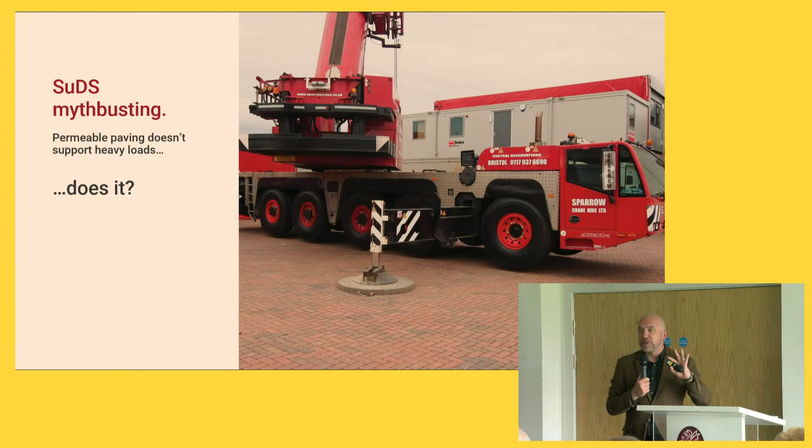So as long as it's been installed properly and designed properly, whatever's underneath it—whether it's a crate, aggregate, or a tarmac DBM layer—they can take the heaviest loads on the road. There are about another 10 myths I could talk you through, but I think you've been patient enough.

So I won't subject you to that, in the same way that I subject my wife to it.

Just to give you a case study, this was one of the oldest permeable paving jobs we'd installed. We went back to Martlesham near Ipswich, where they had a park and ride pavement. It's a brilliant example of joined-up SuDS.

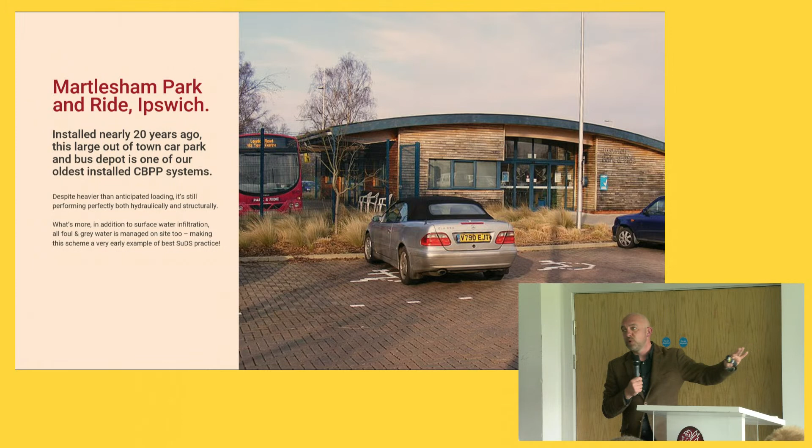The bus depot there in the middle—all of the grey water and all of the foul water is managed on site, so there's absolutely no water discharge at all. All the rainwater is managed by the permeable pavement.

The permeable pavement hasn't been maintained, hasn't been swept, hasn't been cleaned—they've done nothing with it whatsoever. And if you look at it, there's moss throughout all the joints.

We caught up with the guy who designed it, Simon Curl from Suffolk Council. Fascinating bloke—he was a bit of a pioneer all those years ago, and he came back thrilled with it. His comment was, 'Doesn't it look nice with the moss in?'

It looks so much better—though I think we'd struggle to sell that as a feature or benefit of permeable paving. But it certainly doesn't stop it working, because we did the test there and it's still more than permeable enough than it needs to be.

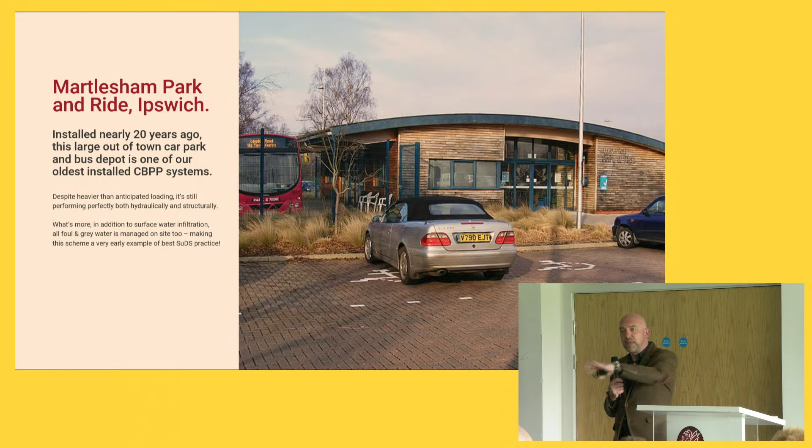There are trees all over it, really simply designed—he just built around the existing trees. There's foliage all around the edge, which is another thing that terrifies people, because they think as soon as the leaves fall off, they'll clog the joints up.

Absolutely no problems whatsoever. So for the real masochists among you, there's an 8-minute long interview with Simon Curl on that particular car park about how well it's working.

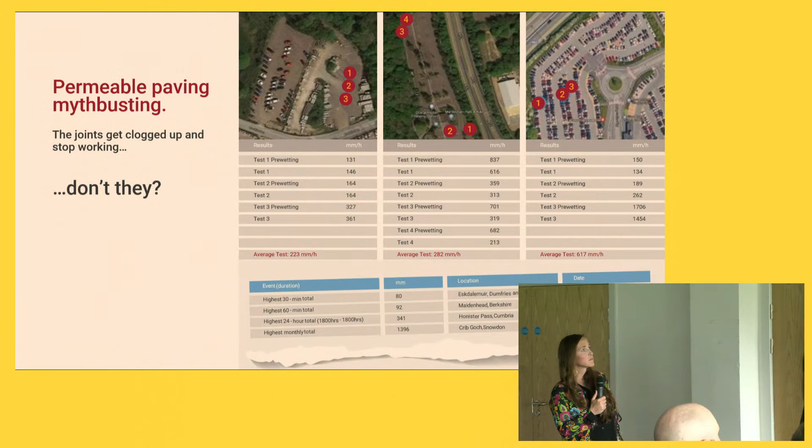I was trying not to go all techie nerdy today at 4 in the afternoon. So without doing death by PowerPoint and being too boring today, Permavoid started life in the Netherlands, and we acquired the license and did a lot of modification and product development. We manufacture it in Horncastle from recycled polypropylene, and it basically creates a structural raft. It started life as a sub-base replacement, comes in 85 or 150 depths. Talk to the wonderful David Burgess after this, who is our engineering guru and works with Permavoid every day. But we started to use it beyond the sub-base approach.

When it was developed, we found we could put it into linear assets and highways, and we could reduce the loading requirements and the amount of cover needed for heavy trafficking. It started to branch out - for example, the Permavoid 150 started to be used for tree pit applications. They then looked at exploiting the capillary cones inside the system for passive irrigation, so water could wick up and support green assets rather than just be a sub-base replacement or used with permeable paving. So the use cases started to evolve over time.

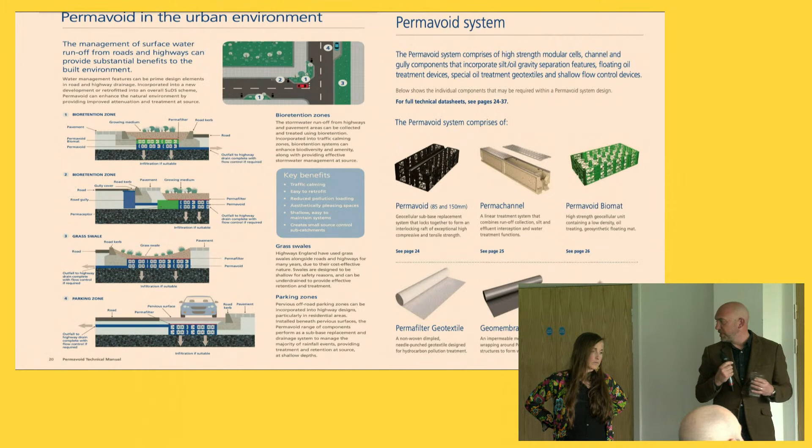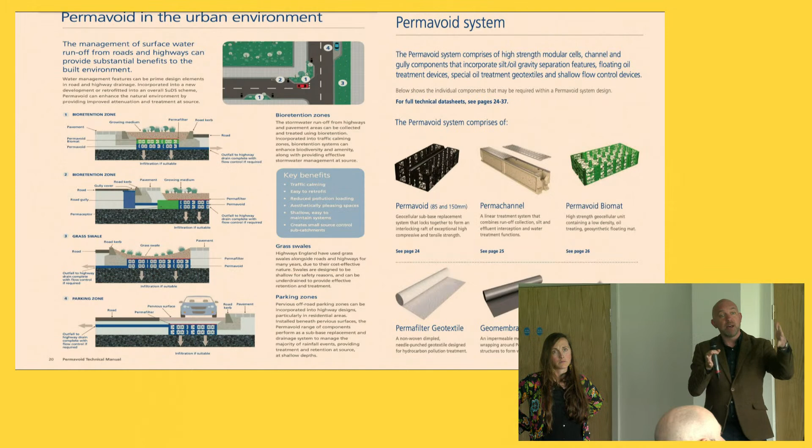And the store, you've got to put the membrane around it? You might, or you might put a geotextile. If a membrane's impermeable, we might put an impermeable membrane around it to hold the water in, then put a pipe on for outflow, or you might put a porous textile around it so the water is stored but infiltrating down at a rate - the impermeable option directs the water out, or if you want the permavoid to just distribute the water more permanently, you're basically creating a structurally sound hole in the ground.

That's effectively what it is.

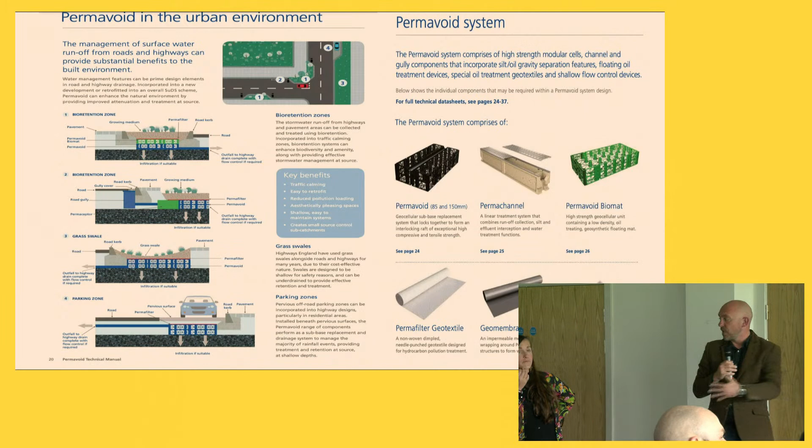Ideally, if you had a massive space - if we were building a house here, we'd put a big attenuation pond on that lovely green field, and you'd have ducks in it, trees in it, plants in it. It'd be wonderful, but we know that's not the reality. So instead of having a pond there, you'd create some kind of hole in the ground, put crates in it so you can drive cars over it structurally sound, and the water is stored until you decide what to do with it. The crucial thing is that storage is there, so it's not creating a problem in a storm event.